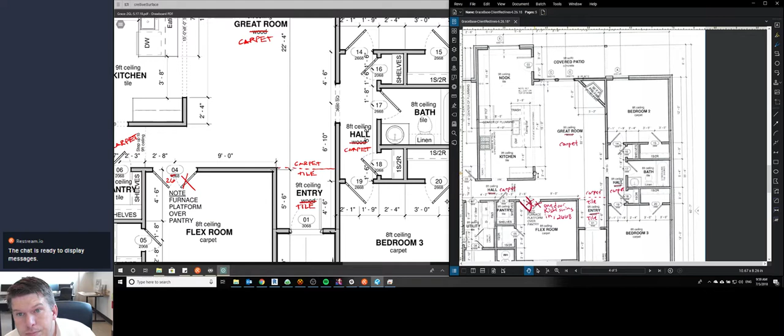That's it for that. This needs to rotate also. No brace for fan. Get rid of the can lights.

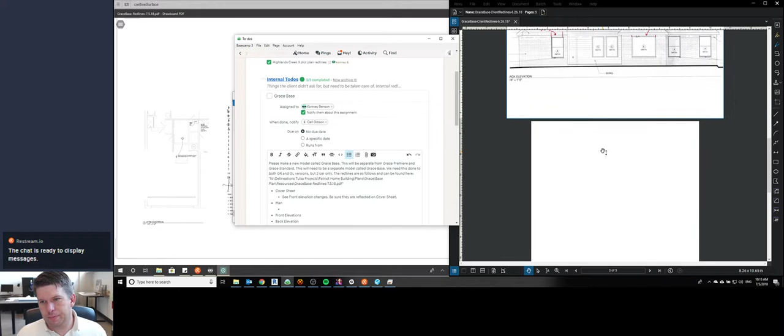Okay, that was easy. Plan. Great room and hall are carpeted. Place separation strip between entry and great room and label entry is now tile.

Entry great room label. Each side accordingly.

Flex room is now a single door, right hand swing in. 2668 door.

Remove tub from owner's bath.

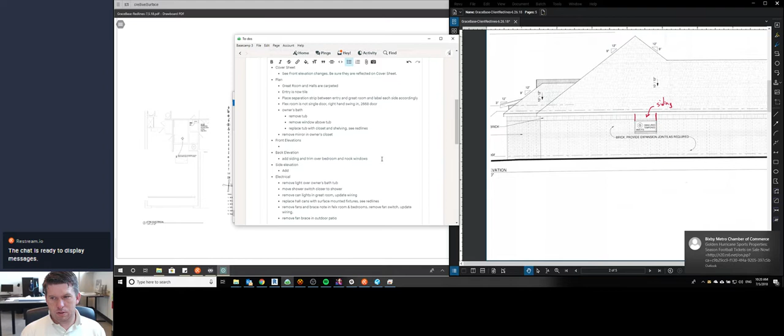That was it. Which elevation is that? Side elevation. Add siding. Wait, there's no window there, so...

Can you please tell me what this invoice is for? So the last thing I need today is to be explaining invoices when I'm just trying to get your freaking house plans done.

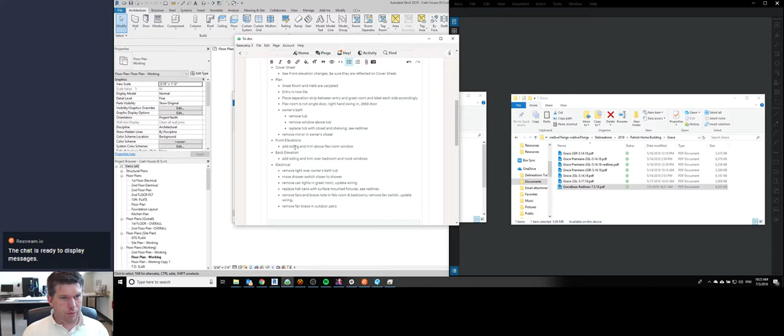Let's remove that because I just made a new version of it. Make sure this is good. So we'll go ahead and add this to do.

And before I switch gears and go on into finishing up this residential set, I'm going to take a quick break.

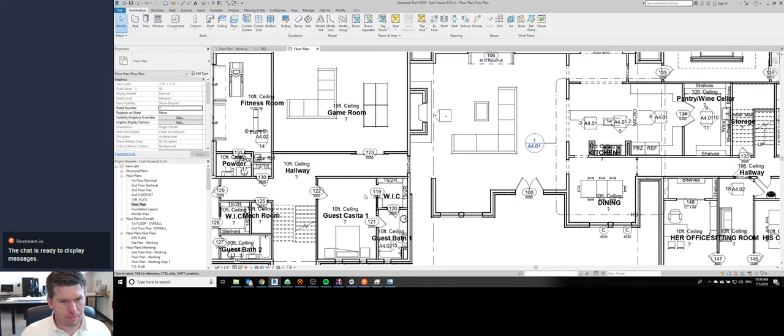It's definitely not that one. It's not the right one. There we go.

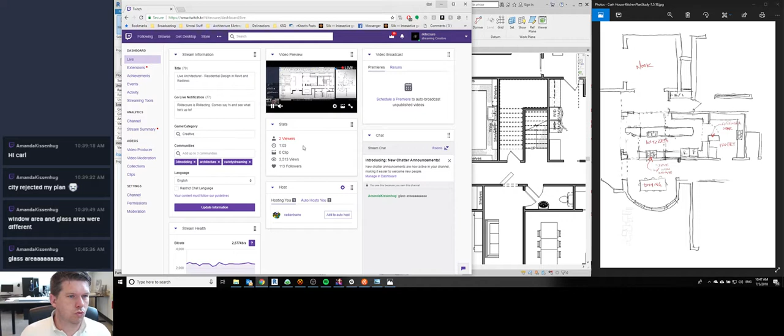Revit, hidden casework door. Okay, well, let's make that happen. For now, let's just put a door in. Let's put a 3680 door in right here.

So that's going to be an issue. We're going to want to move that door over here, like I showed. I think maybe we'll move it up here. I think that's what we want to do right there. Or do we want it to be straight into this spot right here? I think that actually makes more sense.

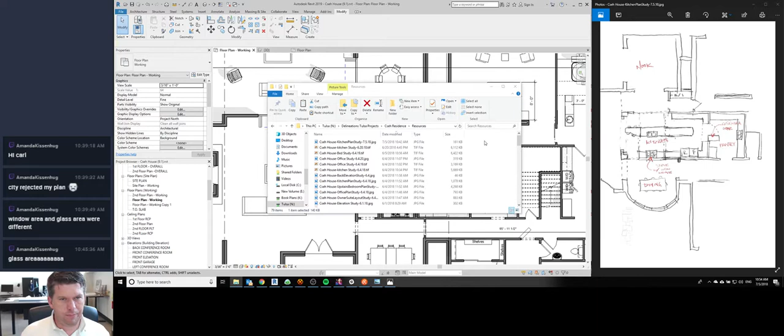Let's see if I can find this guy here. Put it in 9, 6, 7. There's a bunch of them.

I already downloaded these. I feel like I've done this before. No. Alright, 1, 2, 3, 4, 5, 6, 7, 8, 9, 10. Didn't it just tell me 10 a second ago?

Hey, Amanda. How's it going?

Window area and glass area were different. I'm not sure what that means. You mean what you gave them and what they measured was different? Left off at 32.

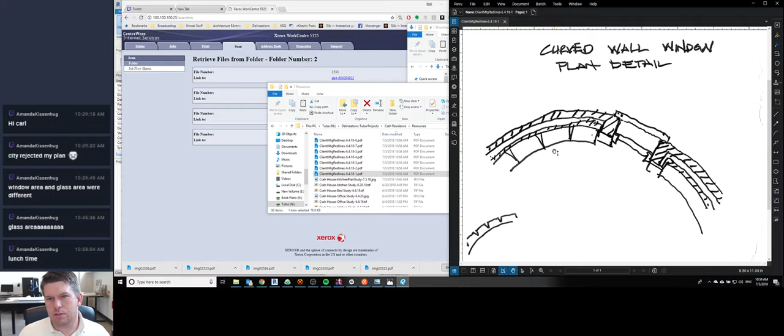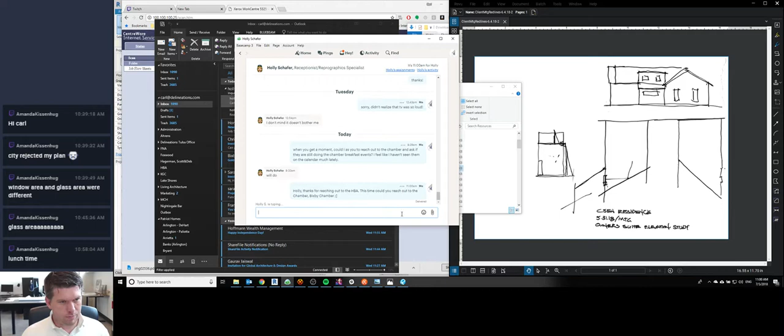This one is... owners suite elevation study.

This was office study.

Might as well just open all of them. Alright, this is game room entrance study.

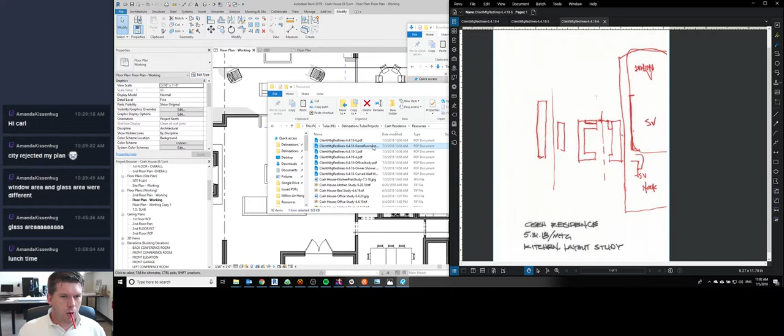This was a kitchen layout study, but it's kind of pointless now. Kitchen layout study. I already opened that.

Living area section study. They're both living area sections. Living area section study. Looks like number 4 does the same thing.

Was this one a little bit better? Is that what it was? Yeah, it was a better copy. Okay. Alright, and let me just check something out.

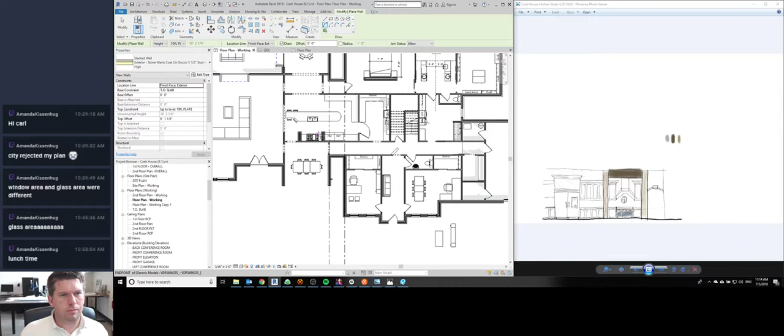It doesn't need to be that wide. So I'm kind of thinking that maybe these go down close to here, and then this moves up to that. And then it's like a corner unit here, with that being wasted.

This is kind of pointless here too. There's really not that much space. But maybe this doesn't have to be so big, it's like 6 feet. Maybe this can shrink a little bit to make the kitchen a little bit bigger. Like it needs to be bigger.

Okay, this does need to be bigger. Or maybe this nook needs to come into this, so that you're almost traveling through the nook.

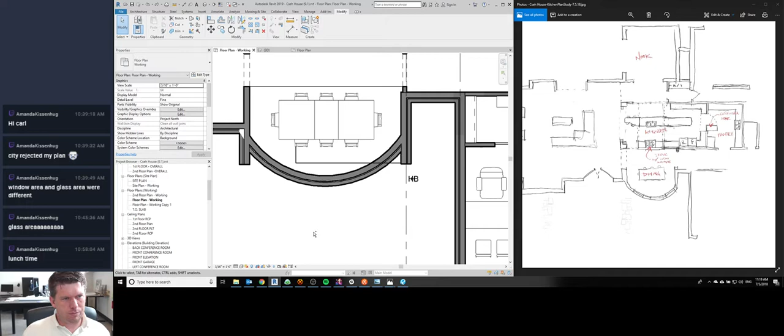Another 2 feet. What happens if I do this? That's too close. What if I bring it in 2.6? What if I just leave it right there for now? Why is that so different than this? What is this space?

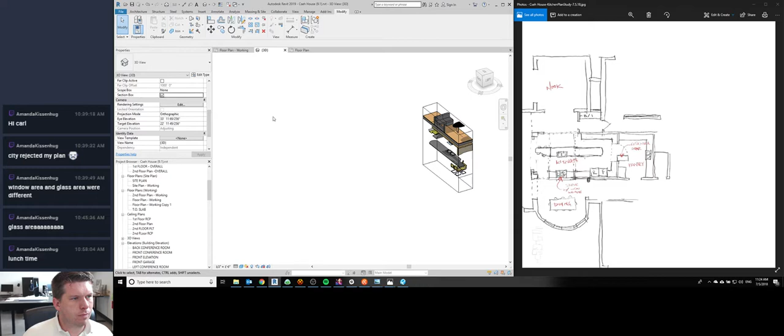Almost want this to sink in like this. That is really big, that can shrink. Let's bring this back to... to shrink too much, but we do want it to shrink.

What if this were 5 feet? So just barely a walkout, which is fine, I think. I think that's actually going to help the back of the house quite a bit. But maybe not that small, maybe this is more like 10 feet.

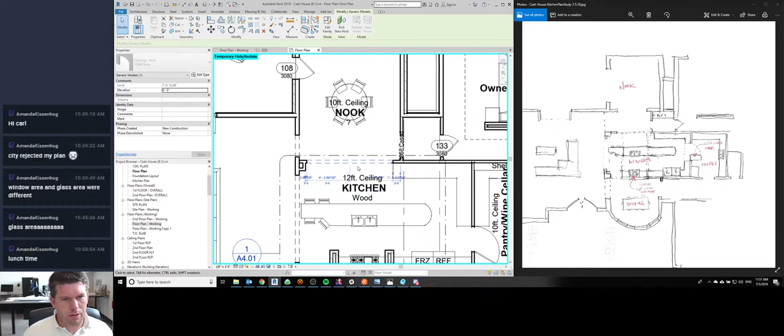I'm going to make this larger also. That's a 12 foot, yeah. I think the more of an opening there, the better. And instead of making this like an interior-exterior space, it just ends up like this.

I gotta stop tweaking it, I gotta finish it. Stop tweaking, Carl. You gotta be careful about saying that around here.

How did they end up back in this plan? Okay. I got that, did I already? I feel like I put it built in right there already at some point. Right.

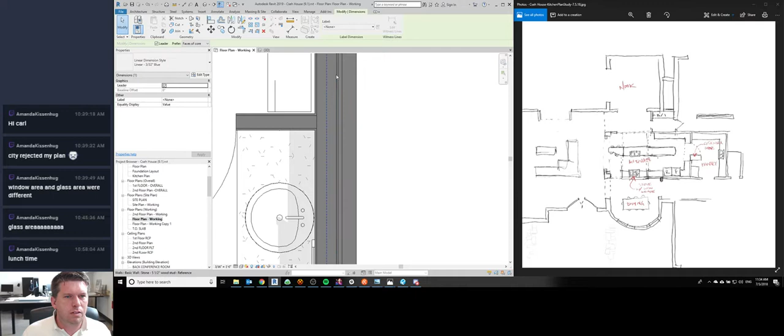This is going to be one of those walls where I can't dimension to the one thing that I want to dimension to. Yeah, that thing right there, I want to dimension to that line. But no, it's going to dimension to the grid instead, because Revit's just going to be a jerk. See, I can dimension to that one just fine. I just dimensioned to the grid. Why can I not dimension to that line? I can dimension to that line, but not that line. Jeez.

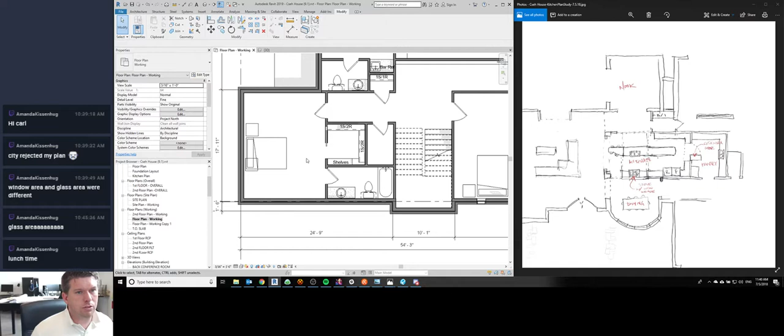And we can even make that smaller if we need to, if we stay above the square footage line that we're currently at. Okay, I think I need to massage this up a little bit, and get these walls exactly where I want them, but layout there is pretty much done.

I can give myself a little bit more space by not making those real brick or real stone, that can be lick and stick. Give us a little bit more space in there also. If this became like an outdoor space, we put a little awning right here and kind of shifted everything down.

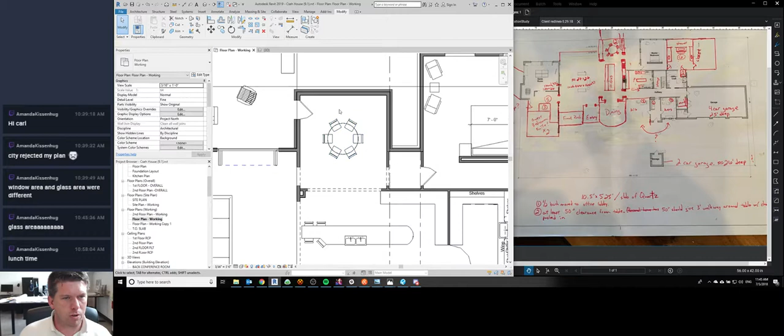So we got that taken care of. Half bath moved to office lobby, right there. At least 50-inch clearance from table, 3-foot walkway around. Yeah, the chair's pushed in. Let's go ahead and save.

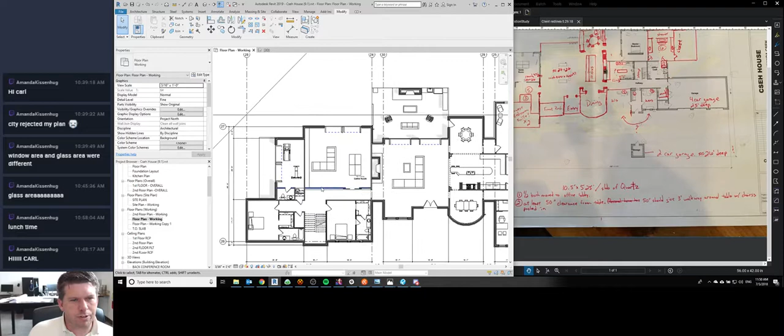I shouldn't even dimension those because that's probably all going to change here in a minute. What's up, Amanda? I guess it's lunchtime for me. I didn't even look at that. I might go a little bit later as I try to figure this stuff out here.

I'm at a point where I think I'm realizing that I'm not... see, I don't understand why I cannot dimension to that line right there. What? I can dimension to there. Why can I not dimension to that wall? If I split this wall... now I can dimension that line. So why all this? Are there two walls there? Is that what's going on?

3D. There are two walls there. That's what was going on. I wonder if that's what's going on in the other one too. Yeah, there we go. Problem solving, that's what we like to do.

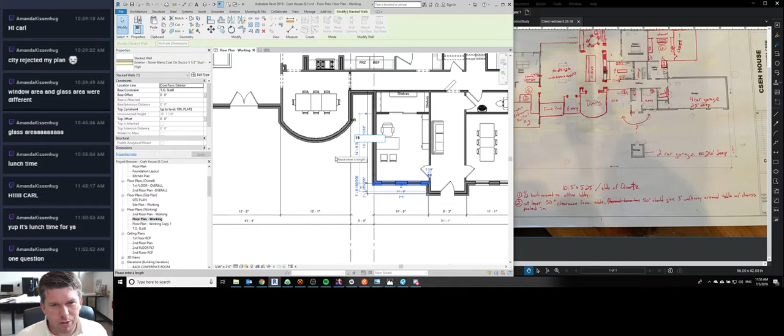Yeah, so we've been update on the Yum Yum box. We've been slowly working our way through the different options, and we've been enjoying most of them. Some of them are definitely a cultural taste, but for the most part we're enjoying most of them. So it's been a lot of fun. We appreciate you sending those to us. I know, right? And I haven't been taking pictures, so I apologize. I will try to get some pictures of the box, of what's left of it, because they're kind of scattered all over the place now. And I'll try to get some pictures of the boys eating it and enjoying it. So

The construction that they're doing right now is - we think that we finally found the water leak. And since the building is... years old, not even 10 years old, they're redoing some of the roof stuff: resealing and recaulking, reflashing, all that fun stuff. And that's what they're working on. They're working on our building right now, and they're supposed to be done by the end of the week. But then they got to come in and rip the entire wall out to put a new rain leader in. So that's going to be fun too.

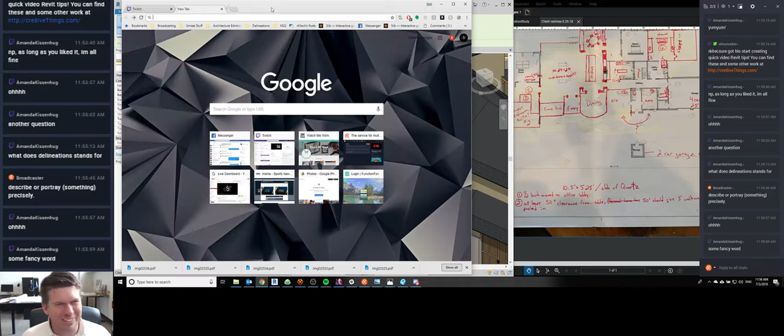Boom. Yeah, so that copy paste did not work the way that it should have. Huh. Yep, it's a fancy word for line, a 50-cent word for line right there. That's kind of weird, I don't know why it's doing that.

This conference room is going to go away. Four closets in each office. Got that staircase to semi-finished attic. We did that, with lots of natural lighting. We did that. Now they're dancing on the roof.

I think we're going to put the mechanical room for this side of the house back here. That way, if we have the pump and filter and equipment for the pool, it can all be right there. I think that's going to be a better spot than what we've got here.

Oh shoot, there's a bathroom right there, I can't do that.

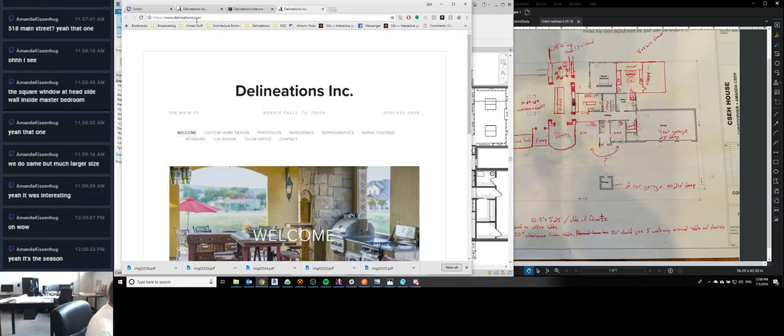Carla? Is that my new nickname? I've been called worse.

So the question is, does this closet need to be this big? I don't think it does. This closet actually might need to be bigger. This closet I don't think needs to be quite so big.

So he said he didn't want to go over, didn't want to use more than one slab for this guy right here. But 10 feet is going to be awfully small. They want a big kitchen with a lot of counter space, but a teeny tiny counter. That's what he wants right there.

It's like that doesn't even work with the space that they want. So yeah, I don't know. I like the way this works better now that I don't have a separate hallway right here.

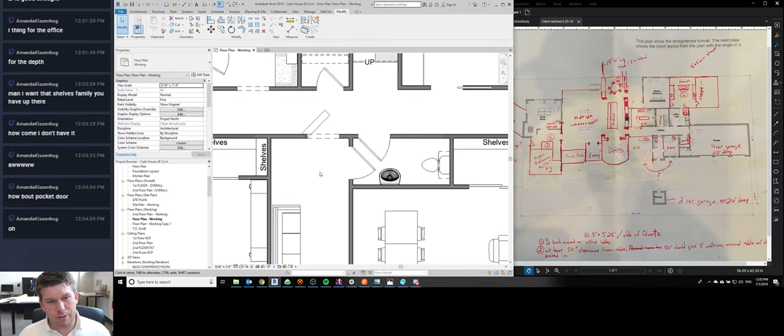Yeah, I could do a pocket door right here, and then pocket doors on both sides, really. The pocket doors are the ADA side. I'm having to worry about all this other stuff going on. Okay, I think this is just going to have to be tight. I think he's just going to have to get over the fact that this is tight.

Between the allergies and the construction noise, I might not last all day. Oh, man.

Because what they want to be able to do is come from their bedroom, just straight through and into their office.

So he wants an 8-foot by 5-foot minimum shower. I don't think he realized how long that is - that's like 12 feet that he drew right here. I don't think he understood exactly how wide that was.

See, this isn't even a temperature change. I think the grass has decided to start blooming. And it's just killing me.

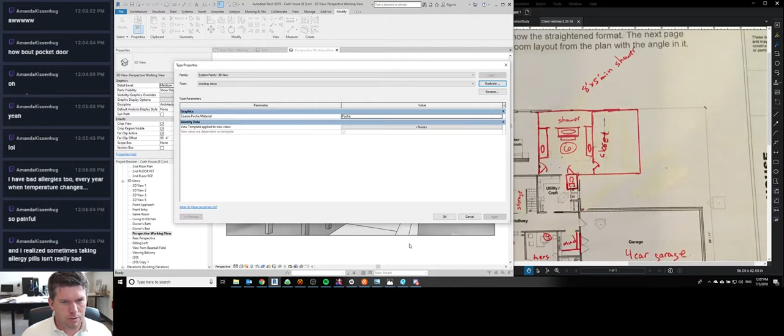That needs to go away. And actually, you know what I can do? Let's do this - let's rename this to Perspective Working View. Working views. Boom! You can make different types of 3D views now. That is awesome. And I'm going to turn the crop off. There, that's better.

Alright, let us... I could have sworn I had done this already too. Where does this go to? There we go. Oh my lord.

I'm gonna go visit for just a second. I'll be right back. Yep, I'll be right back.

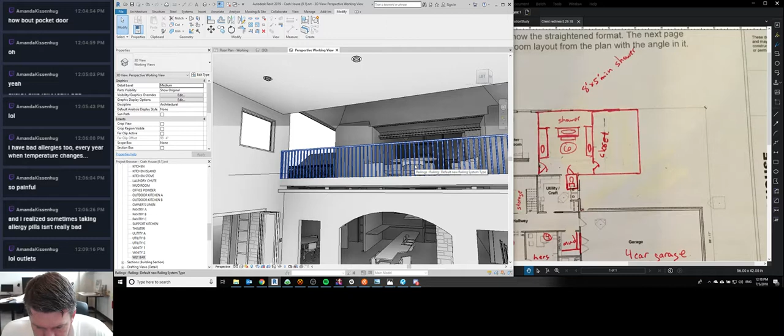Oh, right. Oh, outlets. Yes, outlets. I don't know what you mean. Were there outlets in the wall? Yeah, there's floating outlets.

I wish. You know what I really want? Is the minus key to slow down. You can use the plus key to speed up, but I want to slow everything down quite a bit.

So I think this ceiling is going to be vaulted. I don't know why she put a ceiling in right there, but I'm kind of liking how this is turning out here. This isn't going to be as big anymore, I think.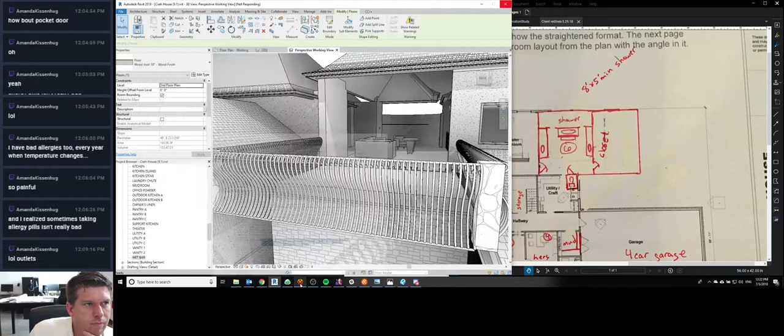So we got that. This is pretty much settled now. Alright, have fun.

Guest bedroom suite - I wonder if he's wanting that angle. I think he likes the angle thing, and I put it back here at the rest of the garage, but I don't know, it seems a little corny now that it's in there.

2-car garage, 26 foot deep. Garage? Four-car garage, 2-car garage. Maybe this slides back to be even with this.

Finish saving, man, come on. Oh man, this network speed is horrendous.

So really, there's 3 parts to this house, which is good - there's company, there's public, and then there's owners. And that works pretty well for what we want to do. Let's line that up there.

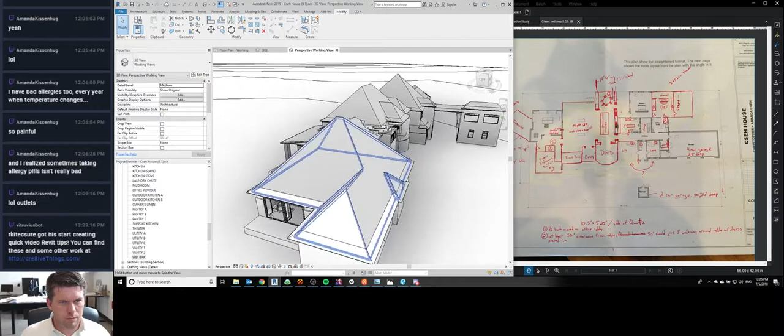Alright, things are starting to come together. This can go away - yep, delete the dimensions, that can go away. Oh yeah, that can actually, you know what I can do with this? Let's... oh man, come on.

Because when I move this, it's gonna... can I not drag this constrained? Oh my lord! Yeah, okay, that actually worked out better than I expected it to. I'm not sure why though.

Come on. Dear Autodesk, if I want to grab this, why does it automatically... it's like, automatically every time it tries to grab the dimension. There we go. Every time.

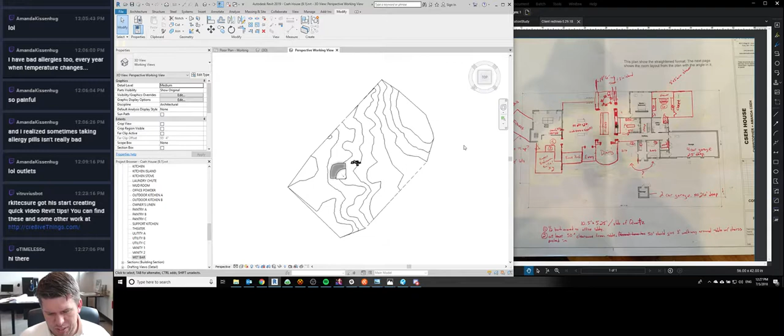Hello, Timeless. How you been, man? It's been a minute. Been a minute.

Why can I not find... there it is. I don't think that is quite accurate. Oh lord, we're gonna have to restart that.

Really sure why. Let's do 1'6" overhang from here. There we go. What is this? Slope on that's 4 and 12. And then this one should be 1'6".

Okay. And maybe it doesn't need to be that high. To make it higher, that makes it higher.

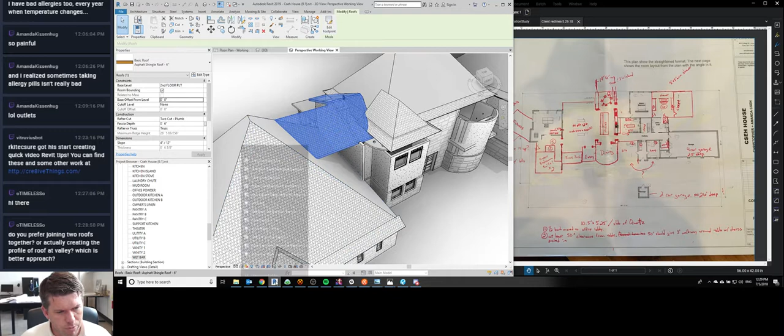So let me come back to that question. What I'm going to do is open up another instance of Revit and show you a couple of our residential projects, and I'll show you why I do it the way that I do it. So while that's coming up, maybe I can finish this in time to do that.

I think, man, I really think these are just going to be lower. So this one gets all crazy.

So I kind of do a hybrid. What I actually do is I join the roofs together, and then I go in - like this one I actually did join them, but you get weird things like this when you join. So if I come in and unjoin this, if I want this to really be modeled properly, I would need to cut an opening in this roof where it joins, and I don't really have a good way to do that. So what I do is this, and I join these roofs together.

Now you see I've got a line right here, so I can come in here and actually do this right here. And then I have a line that I can use to actually cut the opening in this roof as well. So the framing and the joining actually work much better when I do it that way.

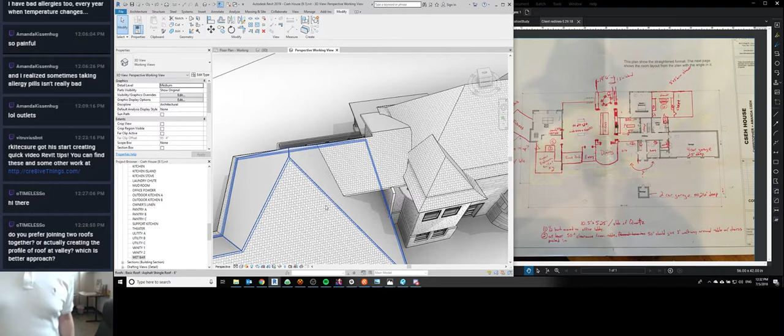Yeah. So anyway, that's kind of where I am with that.

So we do a lot of... I came from the commercial side, doing a lot of commercial stuff, and roofs are usually flat roofs, not too complicated. Then I started doing residential stuff. I thought residential can't be nearly as complicated as commercial. Then I started doing roofs, and boy, let me tell you, residential roofs are something else.

So let me open up one of these guys right here. I think this is going to be a good one to show. That's going to take a minute because our network has been painfully slow recently.

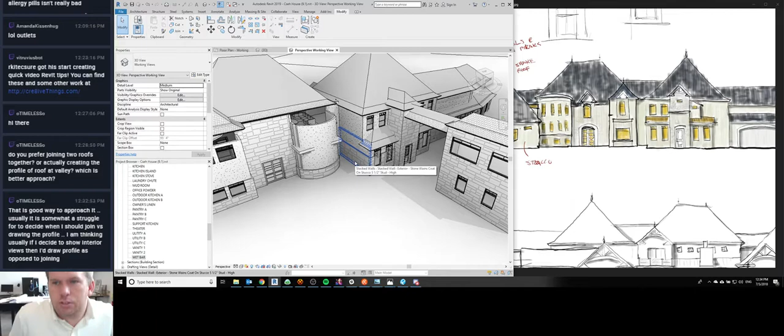Look, there's a door. Oh, I'm just going to leave that right there. Alright, I don't really know why I'm kind of floating around out here in space.

I think I originally was going to go look in the bedroom, in the kitchen area, to see if I liked the things that I was seeing here. Maybe even, this isn't too bad. I like the way that this is kind of flowing here.

There's going to be built-ins right there on the left. Here's the bedroom. I actually really like that the tray starts right here - you can put some cove lighting in and kind of splash this wall. That's a happy accident right there.

Hello. Okay, so I think I was kind of looking at, I wanted to see what this was beginning to look like.

What am I standing behind here? So that tub is right in the middle. I think this all needs to go back against the wall to give more space right here. Right in a wall, that's what's going on here.

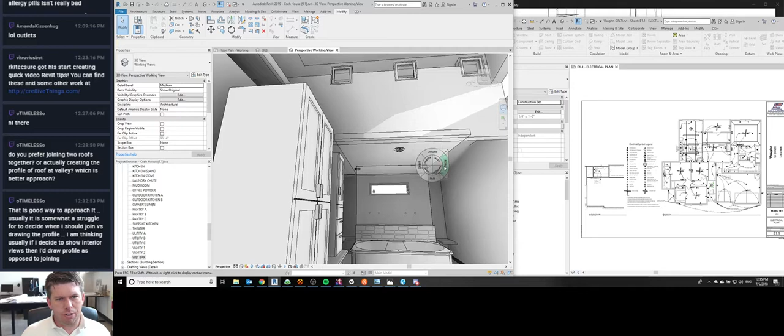So what we're going to do is, above the shower area, we're going to keep it a low ceiling and low roof, and then pop it up so we can get some windows in here and get natural light into the bathroom. The issue is these are all north facing, so it's going to be very diffused natural lighting - there's not going to be a ton of light coming in. We can get more light by making this larger, making it rain glass, and using some landscaping to diffuse any kind of silhouetting that would happen through the glass.

We could also put some glass here, which would be west facing. So those are all options for getting some more light in here, but I kind of like the way this is going to work out. I think this is going to end up being good. We're going to have to work with our modeling issues there.

I think someone just came in. I'll be right back. Just kidding, it's just the people on the roof doing construction.

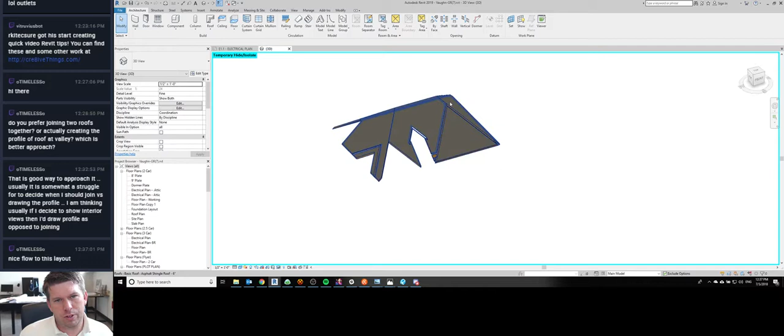Okay, so you can see here that you just can't do this roof with one roof, right? I was like, screw it, I'm not going to try it with one roof. So I have multiple roofs going on here. And if I were to show you just this roof, there's a couple places where I've actually cut the roof, and a couple places where I haven't quite cut it or haven't cut it at all. Maybe I haven't adjusted this.

If we look at the sketch for this roof, you can see there's actually no cuts at all, and I'm using the opening tool to make those cuts. The reason I do the opening tool on these roofs is because I have two different slopes - 11 and 12 on one side and 9 and 12 on the other.

And Revit has a really hard time when you do a double sloped roof, and I'll show you what I mean by that here. So with this roof, that's the main roof right there - you can see that my rafter hits the framing dead on right here on the 11-12, and the whole roof is sitting right on the 8-foot plate on both sides on the 11-12.

Okay, for some reason that one's not showing. I think it's because that's joined. If I detach top there, yeah, you can see it - it dead ends right there where the plate height is, because this wall is right at plate height as well.

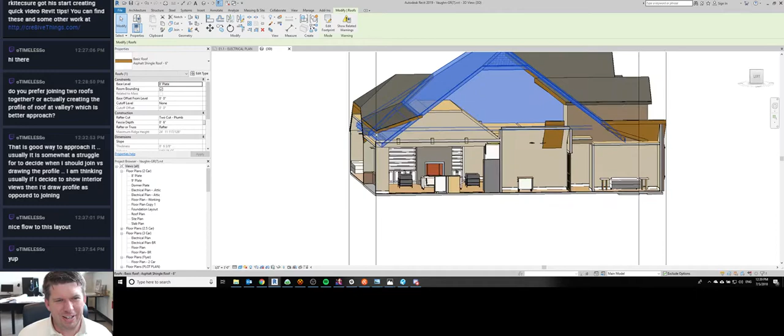Maybe this was a bad example. Anyway, on that 9/12 slope, it doesn't hit right at that part. It's like fractions of an inch off, and it's not a pretty fraction either. It's like 1/256 of an inch or 1/128 of an inch off.

So instead of being able to adjust the heights to make that work, it gives you an error. It throws an error. It can't make that roof if you try to adjust that. So that's one thing I just live with.

The other thing is if I start editing this profile, it really doesn't like trying to figure out what to do with all those different slopes, especially since this is different from this. And when it meets, you get uneven soffit heights, or eave heights, I should say.

So I've started using the opening tool to cut holes in problematic roofs. The issue with that is sometimes you can't find those. You have to kind of hunt for them.

Let's see. It's pretty clear that there's an opening in this roof, right? But whether or not I can find it is a different question. So I kind of have to end up doing this thing where I highlight things, and now I've got two roof cuts, and I'm not sure really.

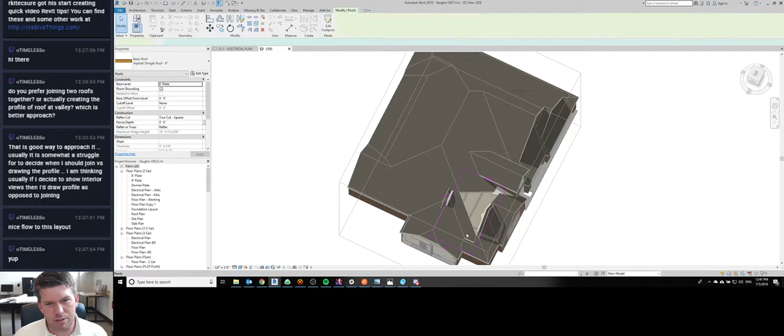Like some of these, I have not done that. So this is one. Here's one that I came in and reformed the shape. It's no longer a rectangle shape.

And sometimes it comes down to, do I really need to hide this? Well, we do in this case, because we're doing a VR model of this. So we do need to actually cut that out somehow in this model.

So yeah, exactly. What I would do in this case is come in, and because I can't get rid of this slope, since the slope is defining where that roof should hit the plate, I have to make an opening. I guess we haven't done that with this one yet.

So if I were to come in—I did not mean to do that. There we go. And do an opening for this one, it would look something like this. Let's do opening, and I do vertical. I don't do dormer roof, I just do a vertical opening. I would come in and do this right here.

And I would find that roof. Where is it? There it is.

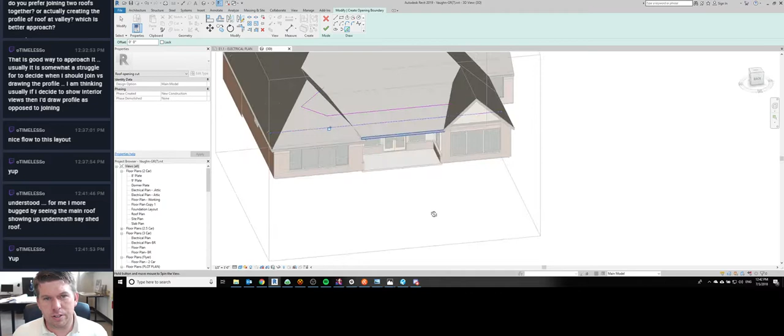The other thing is if you've already put fascia on these roofs, you want to go in and remove that fascia before you do this. Otherwise, you're not going to be able to pick the edge to remove the fascia later on.

It's funny because with this builder, this opening cut profile is the same on just about every single one of these houses. This little 2-peak profile here.

So after I got that, you can see the roof no longer shows up underneath there, and it looks more like what it will be framed as, with the roof stopping right there and the ceiling joining right there. So it takes a little bit to get used to it.

Yeah, and you can probably bring this roof down to do that right there. But yeah, see, that's a nice clean join, except for this right here. I don't know what's going on with that. That's a little weird. They're starting at the same height.

Maybe this just isn't coming over far enough. I think that's what's going on there. This needs to come over to right. Bring it over to right there. There we go. And this can align to right there.

Attached walls. Okay, that's fine. So that's a little bit better right there. Nope, not quite. I didn't quite catch it. You get the idea, though.

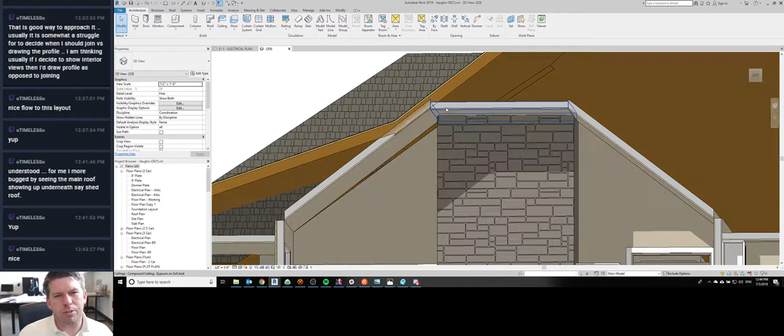That's a little weird. I wonder what. Oh. No, I don't have any explanation as to why that did not go all the way across. Doesn't matter because I'm not saving it anyhow. But you get the idea.

And you can see I have the same issue here where it's not quite framing the way it's going to frame. You have to be careful about using that because this will actually frame all the way down, right? There's still studs that come all the way down to here. It's just not sheathed and decked and finished. So maybe you do want to show that all the way down somehow.

And just cut it to where it's not showing underneath inside the house. So some things to consider there, because we're obviously going to have framing across here, but that roof framing is going to have to come down. It's going to have to meet something, and if you need to show that in the model, that might be something you need to consider. So I'm going to leave this open.

Oh man, they're sealing the roof, and it's like I am trapped in this office with permanent marker. It's like somebody just left a pack of permanent markers open. And that's what I get to smell right now.

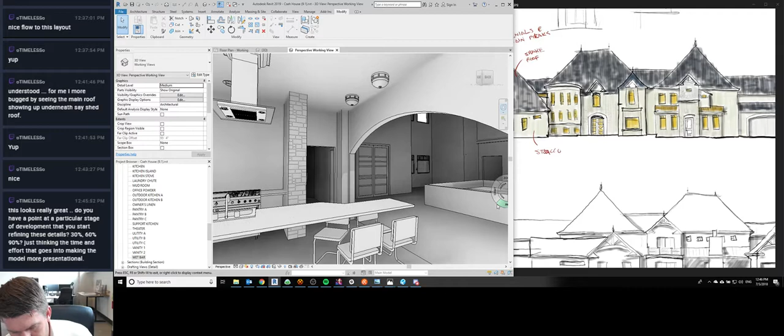It looks really great. Do you have a point at a particular stage of development that you start refining these details, 30, 60, 90%? Just thinking about the time and effort that goes into making the model more presentational.

So when they say that they want to be able to see 3D views, you start it immediately. And it comes with a little bit of experience in terms of knowing - my philosophy is that modeling should get me 70% done with my documents, and then the 30% that's left is detailing and annotation, right? So I model things to a point where I should be most of the way done with the documentation before we even really get to the documentation stage. That's my goal, anyhow. This needs to be flat and it needs to be tall.

This needs to be like opening flat, and it needs to be 12-0, 10-0, 12 foot wide, 10 foot wide.

Is this at 10 feet? What is this at? Did they say they wanted a 12-foot tall ceiling? I'm going to keep it 10 feet, because 10 feet is pretty tall. Make this 9 feet. Sorry, I know I didn't finish my sentence there. I'm not really sure where my thought was.

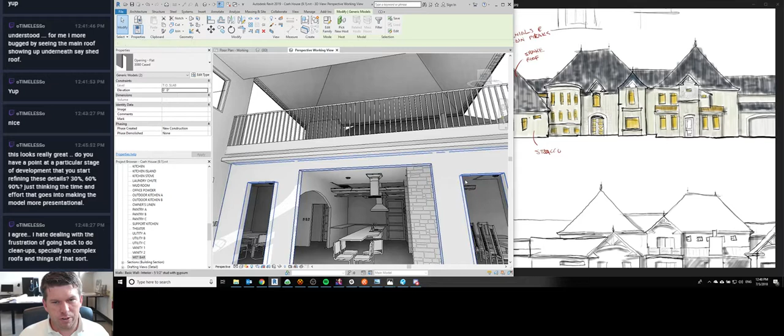That's nice. So I've got someone here in the office who likes to just change the name of the family, because that's how we tag things. It pulls the family type up for the label, but she doesn't change the actual dimensions. So when you change something, it doesn't actually update in the model. I kind of like that. It's not too horribly bad.

Let's change this to a 5 panel with glass. Ta-da! I don't know what we're gonna do with this yet.

Jeez, I might have to close the office, man. It's starting to stink in here. My eyes are starting to burn.

That actually doesn't look too bad either. A little low there. I need some windows in there. That does look a little small though, doesn't it?

Where did I go? Goodness. I like how that looks. Now you're walking down a hall and then I need to put my windows in there, but we should be good. Yeah, thanks for the questions. Appreciate you stopping by. That's what I like doing.

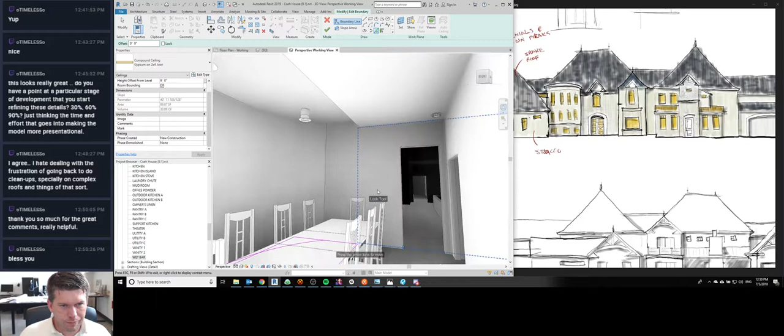So I think what's going to happen is there's going to be a drop ceiling in here, and so let's put this at like 9 feet here. Let's make one right here, and let's make one right here. Eight. There.

So that way there's a little bit of definition there. This is dining, this is hallway. Kind of like that. Although I'm almost wondering if it should be reversed, like if the dining hall should get a really tall ceiling.

I'm going to throw some windows in there in a little bit, but not right now. I feel like that is kind of tiny, isn't it? Like that's a little cramped. I feel like they're going to want more space than that. It looked bigger in the plan. Huh, I wonder if it's just because the model pieces don't match.

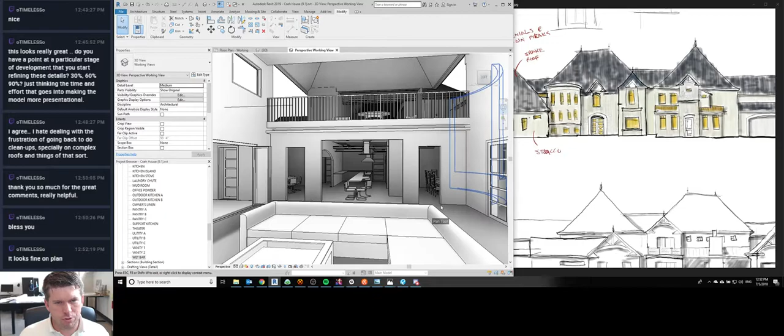Yeah, it looks great on plan. I wonder if the model is just the chairs are huge or something. This is a really long hallway.

So you can see in this model that there's some model detail. A lot of it is just the nature of the components that we use. Like, man, all of these...

We're supposed to come through and check these guys so that they don't look so funky. We're gonna use 3-panel—let's do 5-panel. I think 5-panel is gonna be better for us on this project, also make it look a little bit nicer. So 5-panel on everything, but we're not quite at the point.

See, there's not even a floor here, to where we can do things like... come on now. Where am I? There's the mudroom. Oh, seriously, come on. Dear Autodesk, fix it.

I wonder if it's because that is selected. And there's a utility room. We gotta fix this—they want like a little dog run in here. That's a little funky. So yeah, that's really weird that it looked like it was so crammed in there.

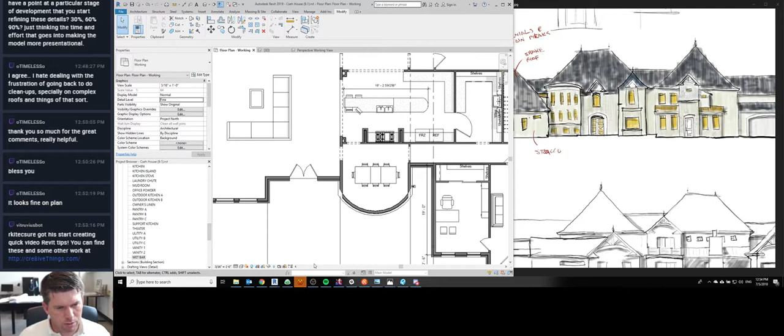I have access to Lumion? Oh, I don't have Lumion installed on this machine. Maybe I should do that.

Lumion 7.5. Let me go find that.

Flexibility, so you can work in perspective view almost. You can do almost everything in perspective view, and they removed the requirement with the cropped view. So I'm actually working.

That's what you're seeing right here. Is, well, you were seeing... hopefully you're not seeing. Yeah, there we go. Okay.

This guy right here is a perspective view without a crop. So this is a full perspective view. So if I zoom in and out, it's actually just like walking, because in 3D view it's not cropped, and it is perspective. I can change that to orthographic, which moves me outside the house—I don't want to do that.

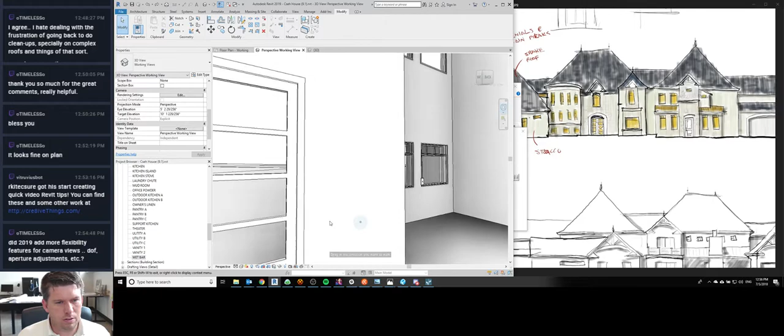To have a feature where you can walk through the projects—Autodesk has not considered this speed at all. I have to bring this way down. Nope, that didn't help. Now everything's just really slow. I turned my DPI on my mouse way down.

Guess I just need to be a little bit more conscious about what we're doing there. I'm going to get rid of this ceiling because it's kind of ridiculous. We want to do something more like this, something that is vaulted. And you know what I'd really like to do is not have those hips on the side for the vault, so we might actually bring this whole thing down a little bit.

Yes, Navisworks lets you adjust the walk speed. That's because it wasn't built by Autodesk, it was bought by Autodesk. I guess Revit was technically bought by Autodesk too, but you get the idea.

It's just the inconsistency. I wish they would just say, hey, for all of our products with 3D walkthroughs, let's have consistent controls and consistent walk speeds. Since Navisworks, which is basically dependent on having the product Revit, allows you to adjust the walk speed, let's let Revit adjust the walk speed too. It's not that difficult—it's only like, what, 120 extra lines of code?

And knowing Autodesk, I bet they could even buy that code from someone else.

You know what we're missing right here is somewhere to hang coats. Like if people come in, where do they go to hang coats? Maybe it's just right inside of here. Maybe it goes right here. Yeah, in the works for 2020. I wouldn't hold my breath.

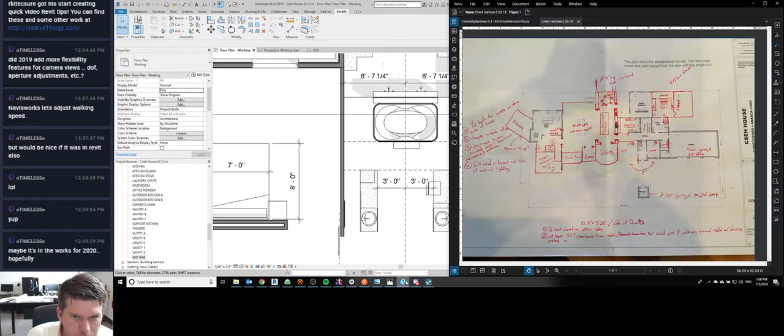Alright, let's go back to our plan. I don't think that there's really any good way to not make this feel gigantic right here. And if they want natural lighting, I think more space is going to be better. What is that? That's an extra foot.

It's kind of a weird dimension there. Why do we have a nice clean dimension here, but a crappy dimension on the interior? I really don't want to save again because it's taking forever. So why? Okay.

What is that? A detail line. What is that? It's a floor, it's cabinets. Okay, so I think I know what the problem was there. That's a mirror, that's a mirror.

Okay, so we've got a weird dimension here. I wonder if it's... is this not... there's a problem. 1'9", that's what—21 inches.

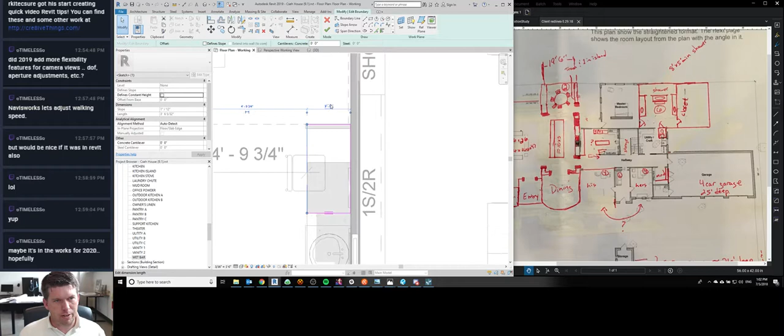Supposed to be... I think it is actually supposed to be 25 inches. 20. Oh my lord, why can't I think right now? It's supposed to be 22 inches? Yeah, it looks right. Yep, 1 inch. Hold on, be right back.

So I actually probably should bring this back into here. Let's look at this. It's kind of interesting.

I don't know why those are there. I like the light switch in the middle of the... I don't think we want the exhaust fan to be under the floor. I'm not sure why that is being used, but that's ridiculous. We're just going to delete that.

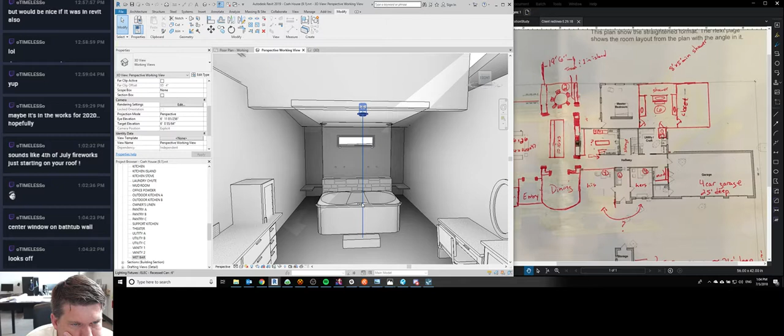Step fireplace. I don't know why we have a fireplace in the bathroom, but hey, being creative I guess. There's a sconce, a light sconce, way above everything.

Let's bring that over here. Oh my god. What else is up there? Yeah, we got 2 more sconces way up there.

Okay, so let's do this. Let's make the height 5 feet and the elevation 0. Elevation 0, height 5 feet. So I don't know why that moved. I'm a little concerned that it did.

It's bad enough that they're putting something toxic down on the roof and it's stinking up the place. Now they're yelling like they're at a sporting event or something.

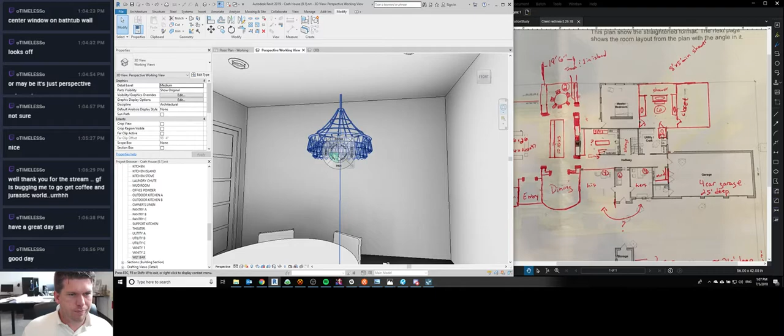Let's make this match that. That way it's nice and open. Still feels nice and open. And if we come here and we're working at the stove, we got a nice view of the living area, not of the front door, which might be okay because you only have to peek over here, or you just say, 'Hey Google, show me who's at the front door,' and there's a little TV screen right there that shows them. My phone thought I was talking to it.

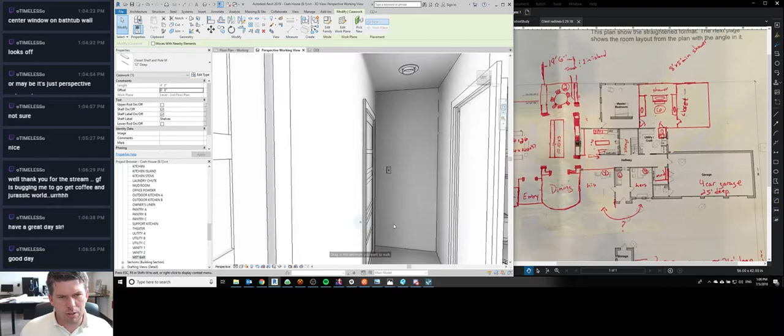Can't remember if we've already made the modifications to this bathroom or not. Oh my word, so what is this? Okay, there's a shelf in the middle of the bathroom there. I don't think that frame should be hanging out the side of the wall there. That could just be me. Personal opinion? Or design fact?

I don't know. Now I'm outside the house. Is this done yet? No, it's not. It's not. God.

So I think in terms of everything that they had in here, I've got 647. I think I've got everything except for this guy right here. It's 50-inch clearance from table, around the nook.

Man. Am good. How are you?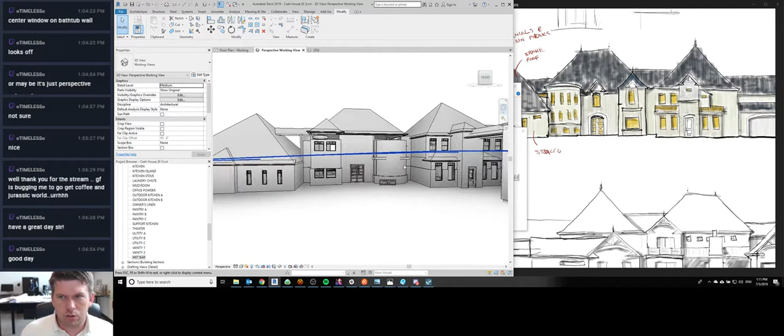Now I'm kind of rethinking this guy right here. I'm almost thinking that maybe it needs to be pushed back or angled, that whole thing here, which we had at one point. I don't know. I think I just need to finish it the way that I've got it. Stop dicking around with it.